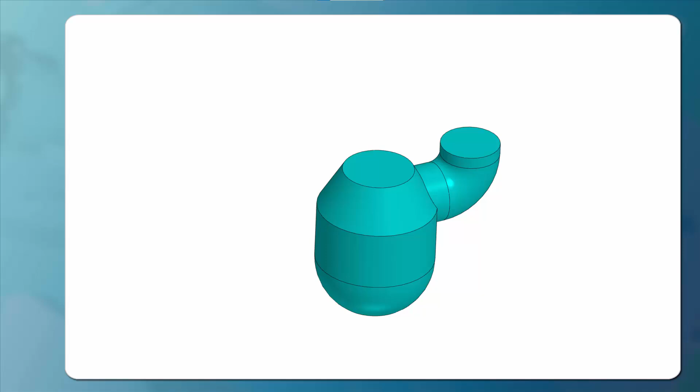First, you need a path. You can use a sketch as the path. To create the sketch, select the XZ plane, the green one, in the graphic area. Click Create Sketch.

Start the AutoLine command. The first point should be placed on the axis of this element. Follow the snap tips to place the point precisely. This dotted line shows that the alignment snap is active. Note that the global snaps are active at the moment.

You can turn them off by clicking the Snaps button in the Quick Access toolbar. Let me turn the snaps on. If you click the button with the triangle symbol, you can choose which snaps will be active. Snaps higher in the list have higher priority. Make sure that Snap to Model Elements is active now.

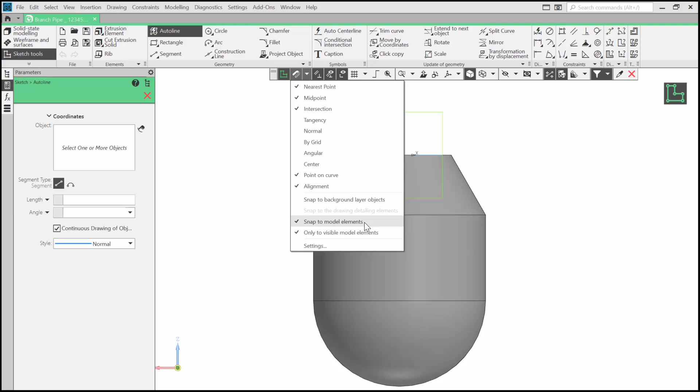But if you want to be sure which snap is working at the moment, you can use the local snaps. The local snaps always have the highest priority. In our case, let's use the global snaps. Press the Escape key to turn off the local snap.

Click to create the first point at the midpoint of this line. Finish the first segment. It needs to be horizontal. Follow the snap symbol. Change the segment type to arc.

Don't pay much attention to the exact size of the elements at this stage. Create the arc. Then return to the segment type and create the vertical segment.

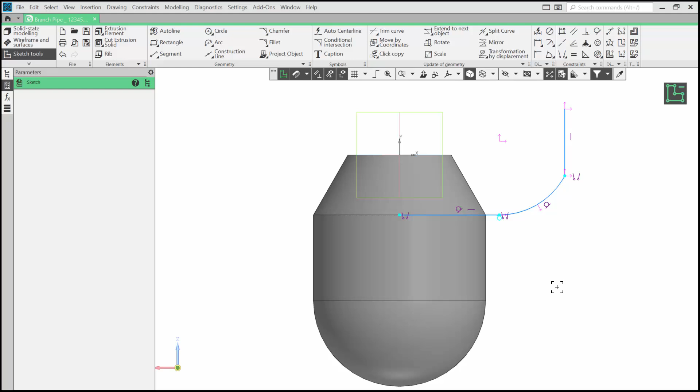Stop the command. Notice that the tangency constraint has been applied automatically here, but it hasn't been applied at this place. Let's apply the tangency constraint manually. Click Tangency and select the arc and the segment.

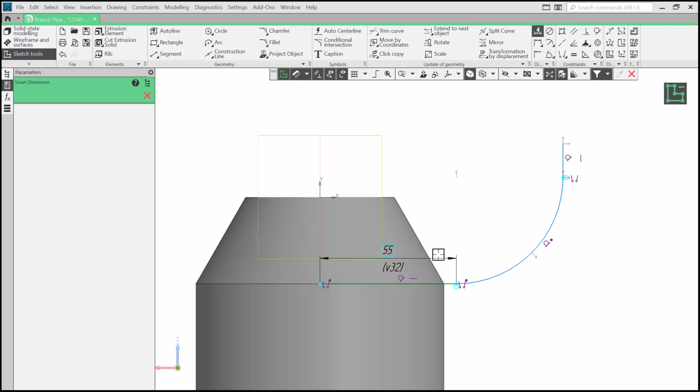It's time to add dimensions. The horizontal segment needs to be 55. Specify the arc radius as 30. The vertical dimension is 10.

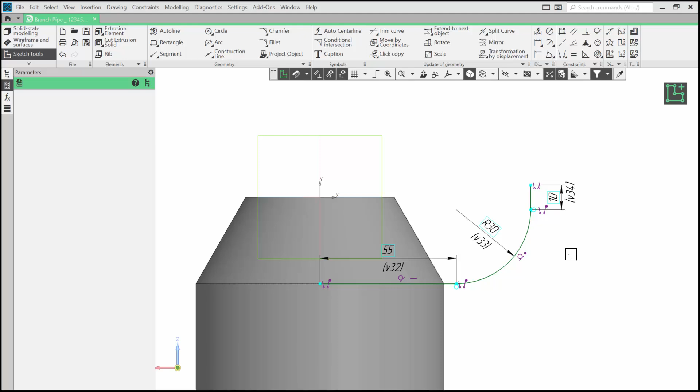All the elements have turned dark green. It means that the sketch is completely defined. If you have a different result, you can apply some constraints manually. Exit the sketch mode. Now we have the path for the short branch.

Let's create the section for it. We'll use a sketch as the section. Create it on the plane perpendicular to the path plane. Select the ZY plane, the red plane.

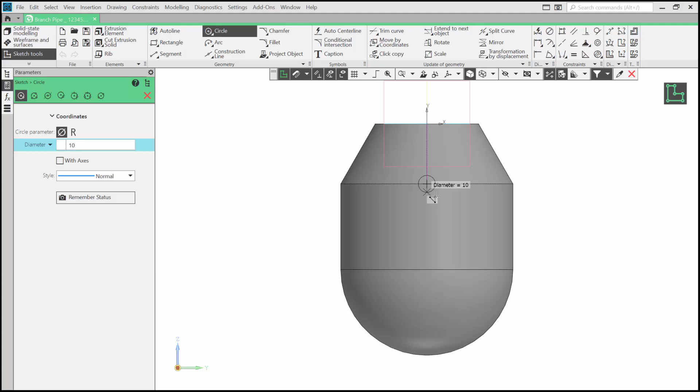Start the circle command. Place the center at the midpoint of this edge. Finish the circle. Add the diameter dimension. It's 50.

Hold down Extrusion element in the Elements toolbar and select Element by Path. Since the sketch was active, it was defined as a section. You can see this in the Section field in the Parameters toolbar. If you have nothing in this field, click the sketch to select it.

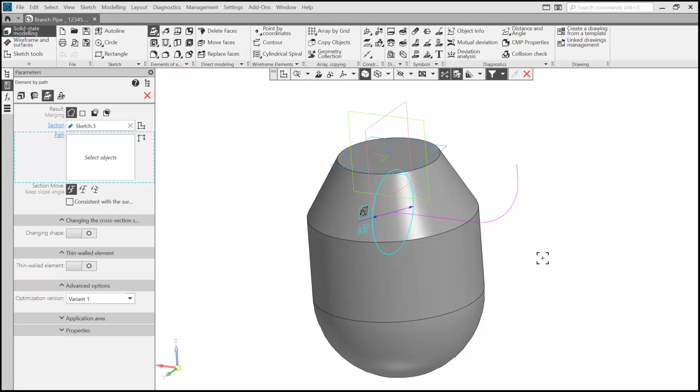To specify the path, you can click the sketch segments one by one. They'll appear in the Path field. Alternatively, you can display the additional tree and select the entire path there. Let me turn off the additional tree.

Take a look at the Parameters panel. Here, you can choose one of the Section Move options. It defines the orientation of the section as it moves along the path. Depending on the selected type, you can get different results.

For example, the Parallel to Itself option won't give any result in our case, because moving the section parallel to itself can't create volume in this vertical segment.

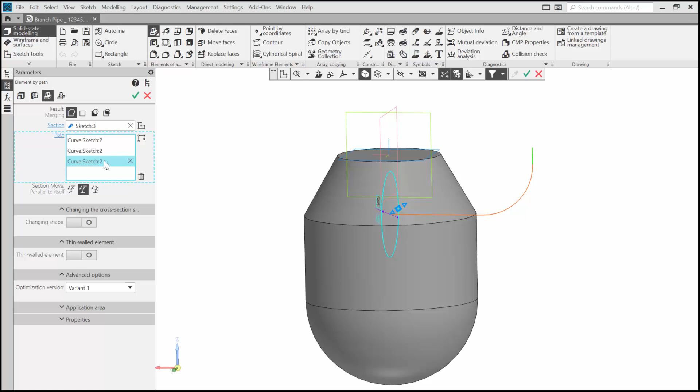If we exclude this segment, we'll see how this type works. We don't need it for our model, so let me restore the branch. This option makes sense for a path lying on a surface. Complete and stop the command.

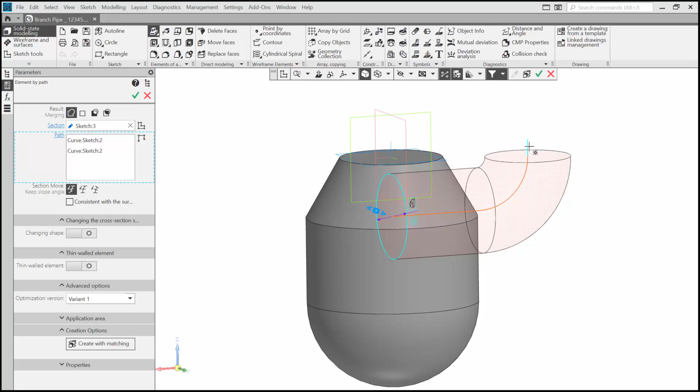I've noticed that I forgot to return the last segment to the path. Let me fix it. In this case, you can double-click on the element in the tree to edit it. Ensure the path field is active and select the segment. Confirm the command. Everything is OK now.